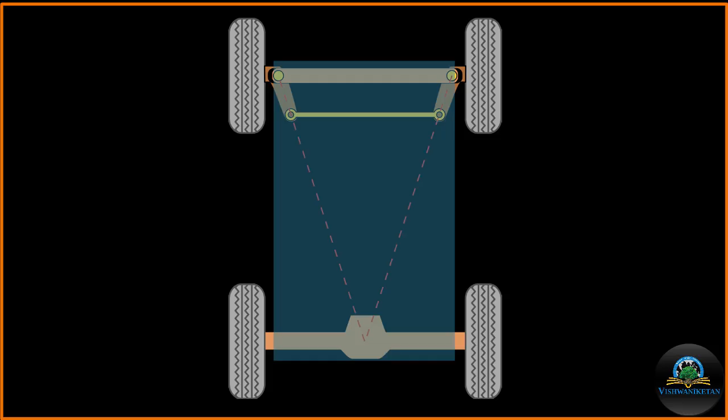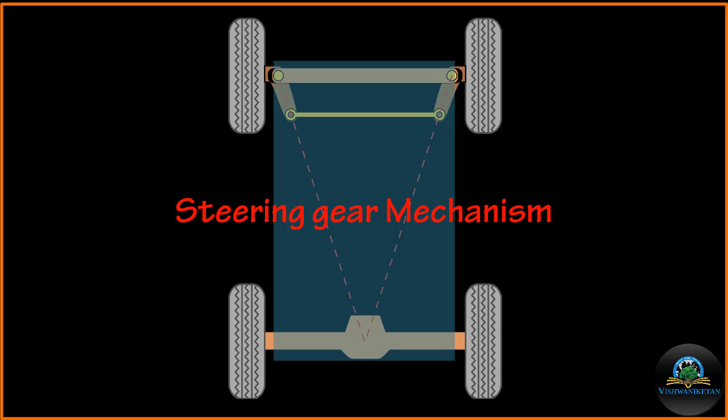In this video, we will be talking about the steering gear mechanism, as seen in this figure, which is the top view of the chassis of the whole car. The entire chassis is not shown; this is just a diagrammatic representation. So you see the front wheels and the rear wheels.

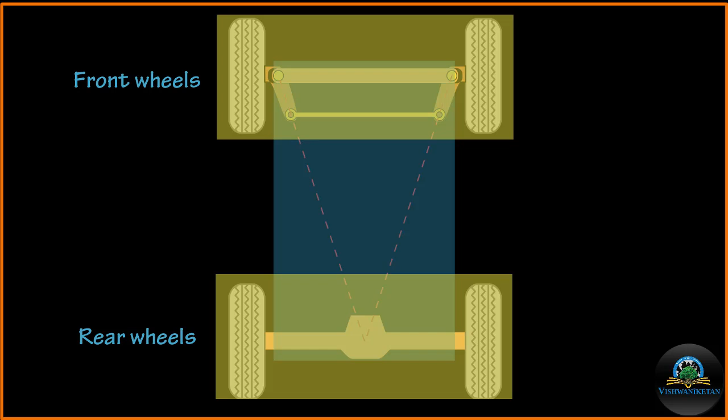This mechanism is also sometimes referred to as a steering gear mechanism. Note that the word 'gear' here is a bit misleading—we have to assume its meaning in the context of the word 'apparatus.' There are no gears involved in this.

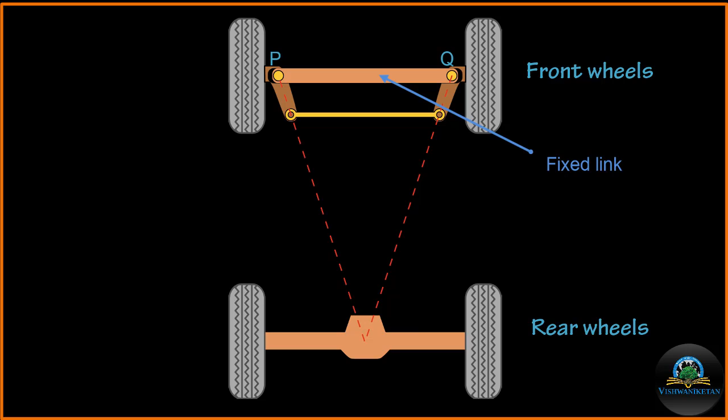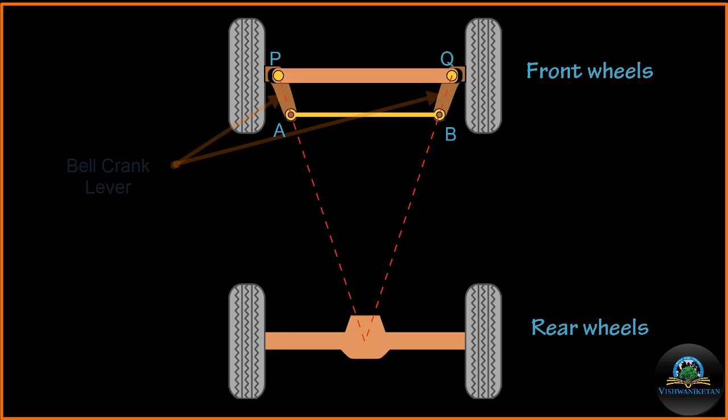Now, as seen from this figure, there is a fixed link PQ, which is part of the chassis. The yellow dots denote a pin connected joint. At that pin connected joint, there is a bell crank lever which passes through each of the wheel centers and comes out to the points A and B. At points A and B, again we have two pin connections where the yellow colored cross link bar AB is connected.

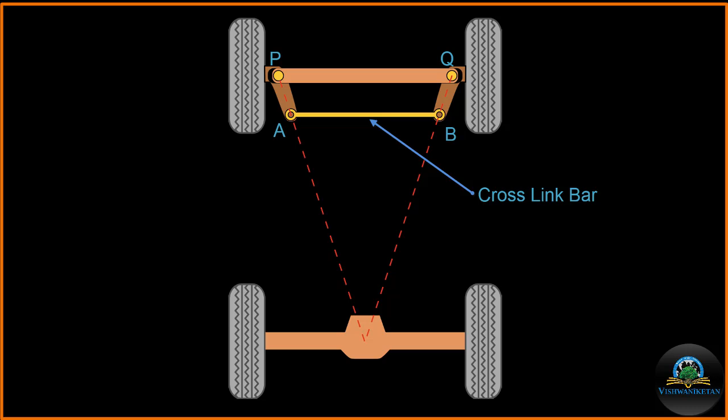Let us consider this vehicle taking a left turn. When the vehicle takes a left turn, notice that the chassis points P and Q are still parallel to the rear wheel. It is the inner and the outer front wheels which have rotated.

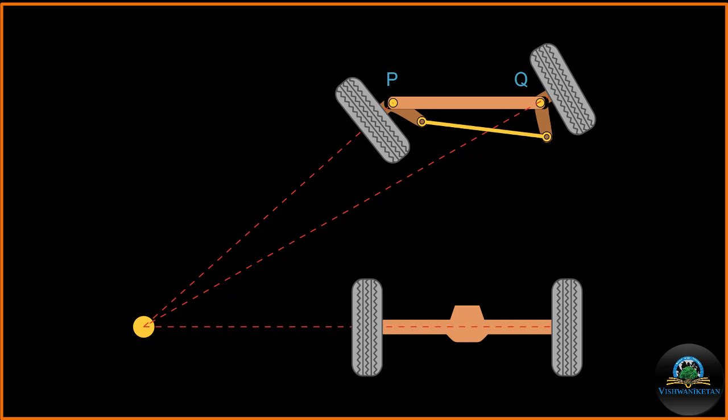What we are going to learn is that the angle at which the inner wheel rotates, phi, is not exactly the same as the angle at which the outer wheel rotates, theta. These two angles are different because we want our vehicle to take a smooth turn without skidding. The skidding would occur because you will agree that the radius of rotation of the inner wheel is less compared to the radius of rotation of the outer wheel, and the outer wheel is supposed to travel a larger distance compared to the inner wheel.

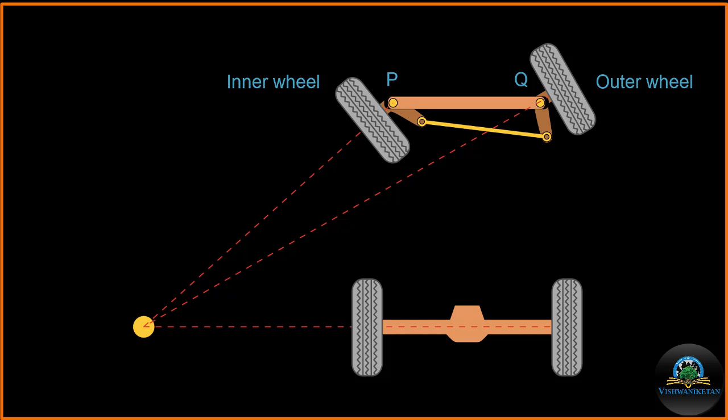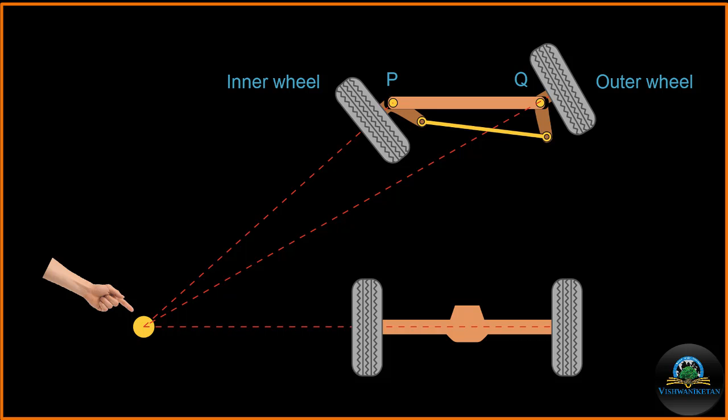Kinematically, to satisfy this equation and ensure there is no slipping, the red dotted line passing through the axis of each of the two inner and outer wheels will intersect at this big yellow colored dot, I. The yellow colored dot I is named so because it is actually the instantaneous center of rotation, and that instantaneous center of rotation also happens to lie on the straight line passing through the axis of the rear wheels.